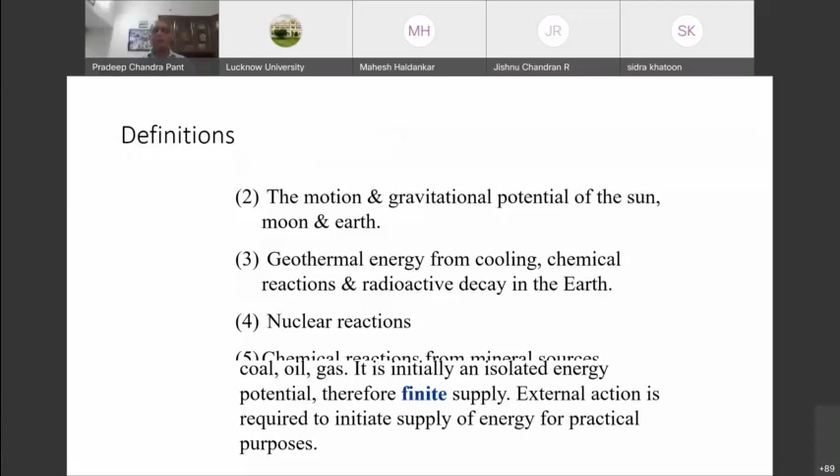So whatever we are getting as solar energy, when we talk about solar energy, it's coming in the form of heat. It's a current energy - in a sense, it is an income to us. Whether we use that income or not, ultimately when we use these as an energy source, you have to have human interaction to extract energy out of it, like if you take some coal in your hand.

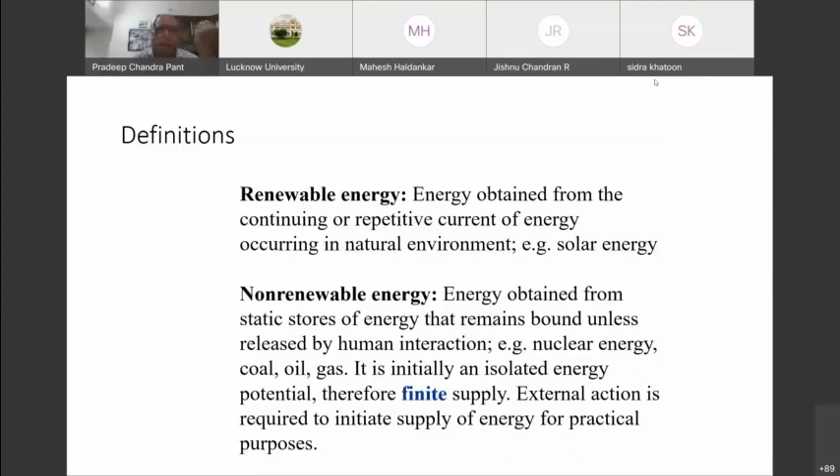But practically, if you look at it, ultimately renewable energy is coming from the environment, and ultimately it is going back to the environment. So the environment is acting as a source, and the environment is also acting as a sink.

And it is directly coming from energy itself, like solar radiations. They come from the sun in the form of heat or light, the visible portion, and ultimately part of that is being absorbed by the earth, and the earth or the atmosphere is acting as a sink.

All whatever is not being used, that goes in. But as we are accustomed to various applications now, if we look at our lifestyle, we do not want that to take a lot of time, and that's why whatever incoming radiations are coming, we have to convert it into a useful form of energy, and for that you require a device, and from that device you use whatever application you can do through that.

Maybe those radiations can be used in a photovoltaic device to collect, and then the electricity can be used for applications, maybe lighting purposes or heating purposes, or running the ACs or fans, or even in industry and all that.

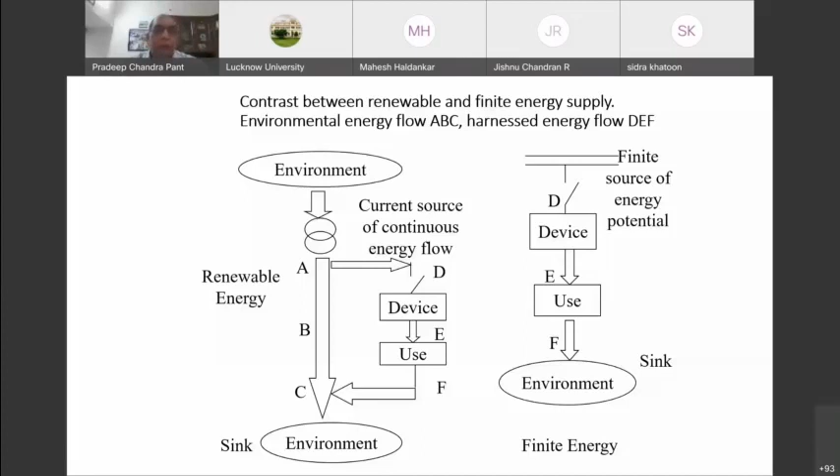Now, if we look at the planning process, ultimately you have to see how much energy resource is available to us. And the second and most important aspect is the purpose for which the harvested energy is to be used. The purpose is very important.

Whether you have to run a locomotive, whether you have to run a bus, whether you have to heat water, whether you have to directly convert it to electricity and then use that electricity for any other purpose. So ultimately, until and unless you are clear for what purpose you are doing that, you cannot just go with the efficiency aspect of that.

And particularly that will have an impact on the cost of the energy which you will be producing. And that price of energy ultimately, meaning the energy generated, and if it goes for application, if it is not being done efficiently and is potentially unviable, then even I will not use it.

And that happened actually in the early 2000s, when the cost of electricity generated from solar devices was so high that nobody went for that. Of course, a lot of research and the economy of scale had also played its role, and ultimately the cost had come down, and now people have started adopting that.

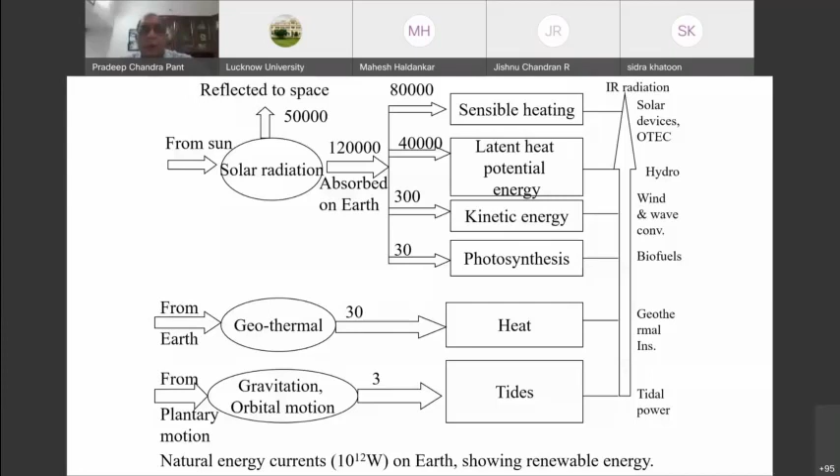We don't even feel it sometimes. You might have observed the term 'red hot' - when you heat maybe an iron rod or something, you feel that energy. It's the radiation actually through which...

Am I audible? I'm getting some kinks here. Hello, no reaction is coming from the other side? Your voice is breaking, sir. Oh okay, I'll try now to keep my mic here. Perhaps, yeah, now. It's not always okay. That may be because of internet connectivity and all that. Though the Wi-Fi is good in my place, but still sometimes it happens. Okay, anyway, so around...

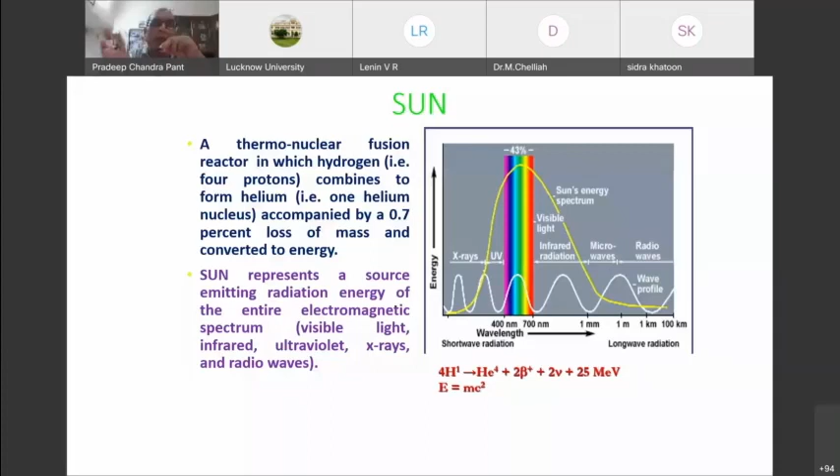But most of the ultraviolet part is absorbed by the atmosphere. If we look at the radiation coming, the distance between Earth and Sun is very large, basically 149.5 million kilometers, and radius-wise also, though the Sun is quite large, it appears very small from here. So practically, if you look at this, it's not like this - it's basically subtending only an angle of less than 1 degree.

So practically, let me put it this way - if I put a small angle like this, is it visible? If you see a big angle versus a small one - if you're far off, then these rays stay parallel to each other. And that's why whatever radiation is coming to us, we say it's parallel radiation, or beam radiation.

The second part of radiation which is coming is basically diffuse radiation. If you look, this is the solar radiation - part of it, which is coming, is reflected back from the atmosphere. The direct radiation is the sun rays that come straight back to Earth without any scattering or deviation in their route - that we call direct radiation. Part of the radiation which is scattered through reflection - there are dust particles, water vapor, clouds also there - so those radiations come after a lot of reflection and scattering and ultimately reach Earth. That we call diffuse radiation.

And the sum of those two is basically the global radiation. That's what it is. And practically, outside the atmosphere, where there is no atmosphere, we get something around 1367 watts per meter square, which we call the solar constant.

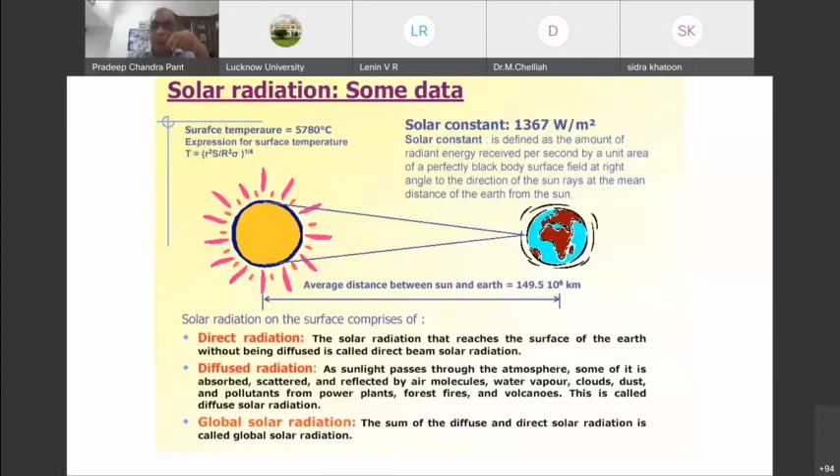Normally as a standard we say 1000 watt per meter square, or 1 kilowatt per meter square, is the rate. At a particular point we get that much, it may be less or a bit higher. So ultimately we look at the solar radiation spectrum - the ultraviolet part, visible part, and infrared part. Outside the atmosphere, we get that type of radiation, almost smooth.

But as it enters inside the atmosphere, we get a lot of absorption bands, some because of water vapor, some because of oxygen, some because of nitrogen or whatever it is. Ultimately this is the type of spectrum we get, which we call AM 1.5, which is basically the air mass.

When the sun travels from morning till evening, the actual distance a sun ray travels within the atmosphere changes. When it is overhead, we say it is at the zenith. But if it's just coming up in the morning from the horizon to the upward side, the distance covered is more. And when the distance covered is more, the absorption will take place more, and the spectrum will change.

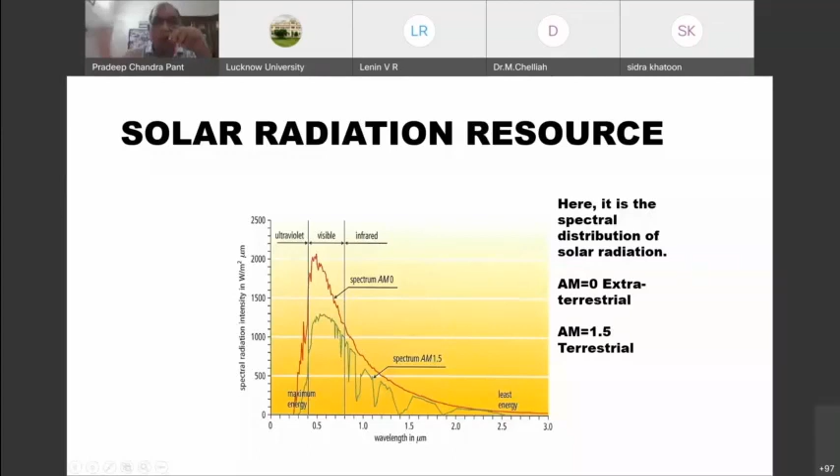This balance is such that the atmosphere layer doesn't get thicker, so that our temperature should not rise beyond maybe 1.5 degree Celsius of average atmospheric temperature. So that's what it is - in a sense this is what has already been explained.

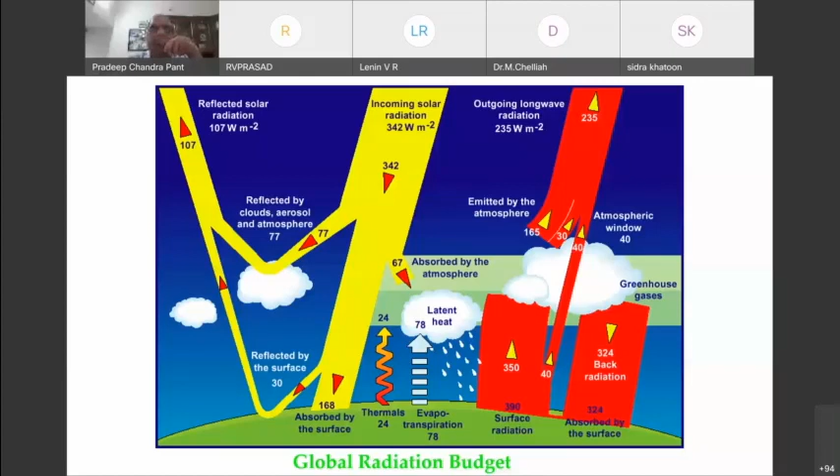So on a typical cloudy day, we get mainly diffuse radiation. But when there is clear sunshine, we get mainly direct radiation. If you measure radiation maybe in September, October, or in February, March, April, you would get a radiation level of around 800 or 900 watt per meter square, mostly direct radiation. But on a typical cloudy day, the total incoming radiation on Earth will be around 300 or 400 watt per square meter, and that will be scattered or diffuse radiation.

So our aim in solar applications is to use both direct and diffuse radiation such that we can collect that heat, and that's why in thermal applications we use the word collector, while in photovoltaic applications it is direct conversion of radiation into electricity. So there the spectrum portion of solar radiation matters, while in thermal application it's basically the radiation which is falling.

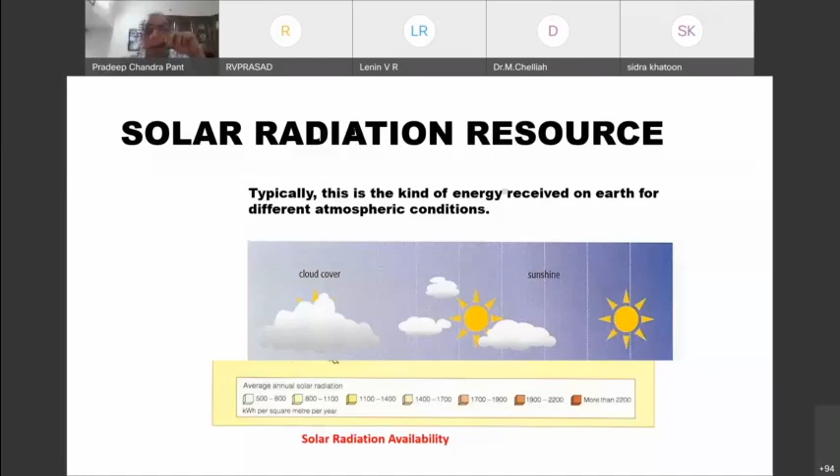Most of the solar radiation means it is very good, the solar intensity is very good. If you look at the polar side, on the extreme north or extreme south, the solar radiation level annually is hardly 800 to 1100 kilowatt hour per square meter, that is what you get in a year. But go a bit ahead and you'll see it's 1100 to 1400 a year in this portion, then a bit more. As far as we are concerned, we are somewhere here, which is 1700 to 1900, or even 1900 to 2200. So that's our level.

And ultimately, most solar radiation, that's why we thought these all the 121 countries within this should come together and make an alliance so that the optimal utilization of solar energy we can do. Now, with the success of the solar alliance, almost all countries are becoming part of this alliance. That is one very great achievement of India, making an alliance and being the leader of it.

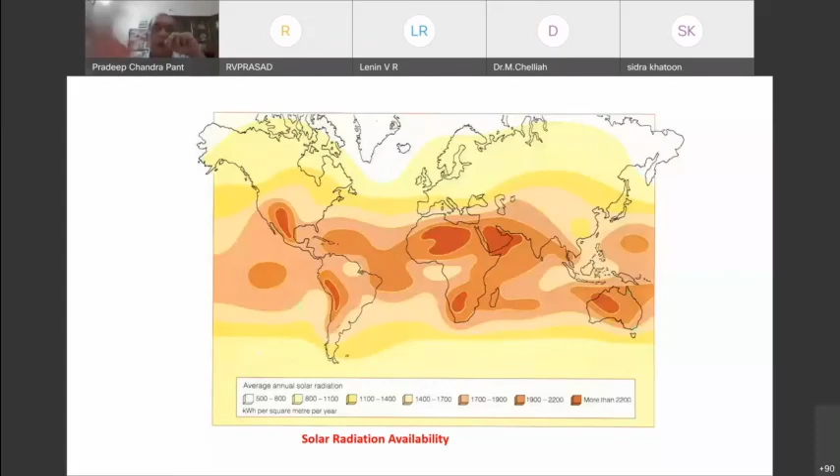And so important is solar energy, and is the solar energy. So how is the solar energy coming? Actually, if we look at the utilization of solar energy, there is one, the direct method.

The indirect method is practically the hydropower, or the wind blowing, only because of solar radiation, because it's the temperature difference between two places which allows the wind to blow from one place to another. And then biomass, of course, through the photosynthesis process you get huge biomass. Wave energy again is similar to wind. And ocean temperature difference means there is a temperature difference on the upper layer of the ocean, and then maybe 4 meter, 5 meter, 6 meter below, there will be a temperature difference, and that gradient can be used for generation of electricity, which we call the ocean thermal energy conversion system.

And to some extent, that principle is also being used in solar pond, wherein we make different layers of salty water. On top it is pure water, and then a bit salty water, so the layer concentration will be more. As the concentration is more, it will be heavier, so it will settle lower. So when the temperature at the top changes, and part of that goes down, it's being used for generation of electricity. So that's basically the indirect method.

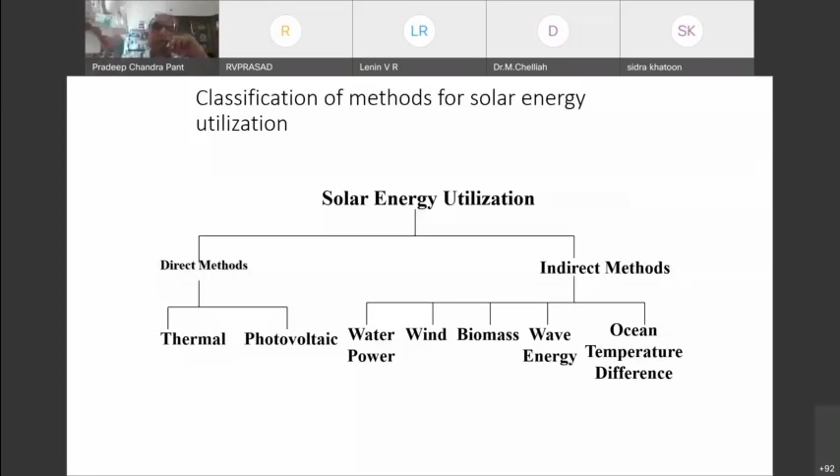Now, if we look at solar thermal, which is basically classified based on its application, you can have a low temperature application, which is practically for cases where you don't require hot water. You require water of maybe around 30 degrees, 25 degrees, or even 15 degrees.

Sometimes the atmospheric temperature is 4 degrees, and you get even 15, 20 degree hot water, and you will feel it's warm. Like you might have seen in hand pumps, borewell water. Most of the time we say that the borewell water is warm in winter and it's cold during summer, and we feel it.

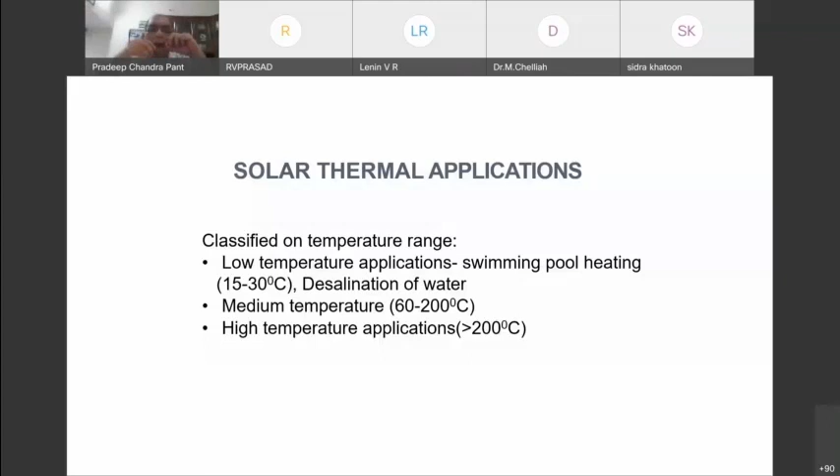Practically, if we look at any solar thermal system, it will have one heat collector, and that's why I'm using a collector here, you have to collect the heat. Then there should be a heat transfer mechanism wherein the collected heat is transferred to a working fluid or maybe the air itself. And whatever heat you have transferred from that collector to the working system, that should be stored somewhere. You require a storage tank, it may be a simple insulated hot water tank or maybe a boiler sort of thing.

And ultimately, if you have to make the system more sophisticated, you can have a regulator system also, wherein you can maintain the temperature or flow, whatever it is. So a regulator system may also become part of it. Whether it is an active system or a passive system - active system is where you have the regulation mechanism, passive system is where it works on its own. So that's the type of thing.

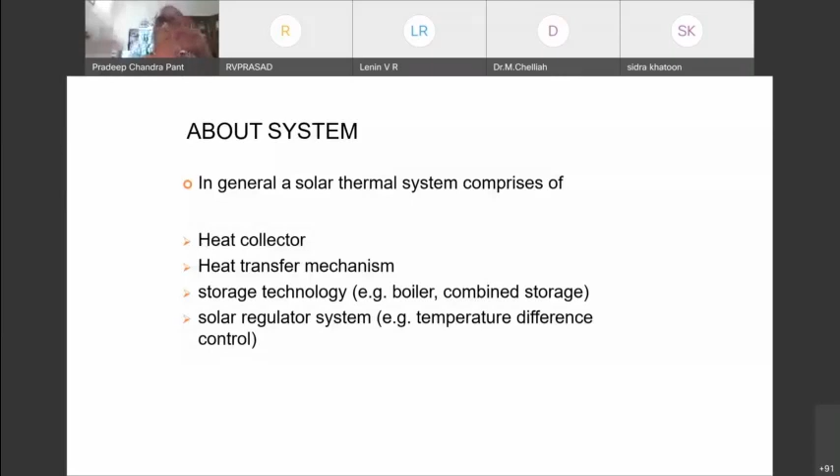So ultimately the whole idea is we are getting the solar radiation, and that solar radiation needs to be used for generating heat, and that heat needs to be trapped or collected somewhere. So that's the whole principle of the solar thermal system. If we look at a typical solar thermal schematic design, you have a solar collector.

If it is an active system, then you may require a pump. But if it is a passive system, then because of the thermosiphon, you get the flow there. Ultimately, this is how the thing works.

So practically, in a collector, what is the collector? The collector absorbs the solar radiation - the sunlight, or rather the radiation - which is converted into heat, and that will be trapped or collected, and then it is transported, the heat to a heat exchanger via pump or directly by the thermosiphon method. And that heat exchanger transfers it into another fluid, and ultimately you use it.

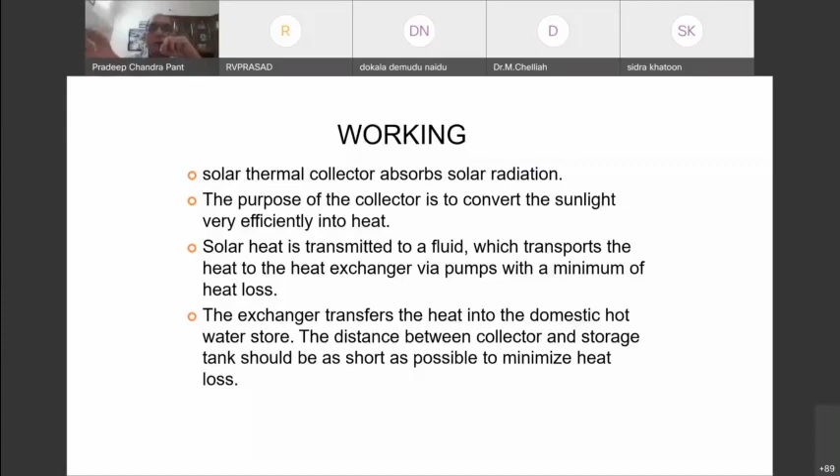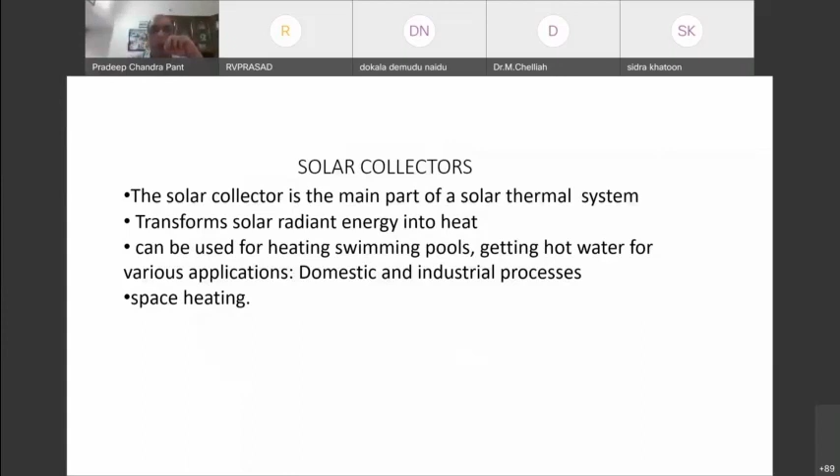So practically, the solar collector is, in a sense, the heart of every solar thermal system, that transforms the solar radiant energy into heat and can be used for different purposes. Now to understand how this whole process takes place, we have to know how the heat transfer takes place. There are only three methods, you know.

The heat transfer process has three types: one is conduction, then convection, and the third is radiation.

To understand this, suppose I have a fruit available, and we have to distribute it among, say, 10 students or 50 students or 20 students, whatever it is. There could be three methods. One method is: since I have the fruit basket, I give it to the nearest available student and tell him to pass it on to his neighboring student. This way the fruit will go up to the last point.

In a sense, I am the source of energy, and conduction takes place through a molecular or atomic process. The heat is absorbed by the first atom or molecule, it transfers to the nearby molecule, then to another, and ultimately goes to the last point. That is basically the conduction process.

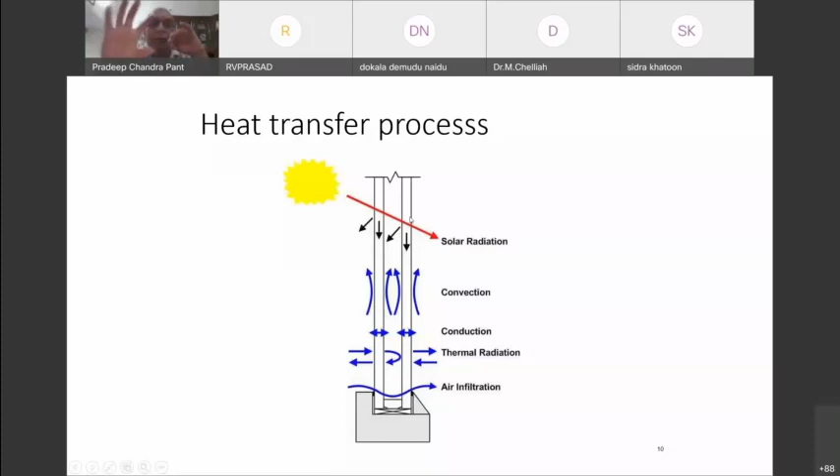So that's the process, basically the heat transfer process. My aim in a collector is to collect as much as possible. So if I have to collect this, the first thing required is the conductor.

Where the solar radiation falls on a metallic surface, what will happen? It will have good absorption and absorb it, and since it is a good conductor of heat, the heat is usually distributed. I take a good conductor material—it can be iron, copper, aluminium, whatever. Then the solar radiation falls on that collector, and once it falls on the collector, it will absorb.

The second thing I need to do is absorb the maximum of whatever radiation falls on this collector, so it should have good absorptivity. To make it a good absorber, the visible portion, which has higher energy content, needs to be absorbed—the UV and visible portion should be absorbed.

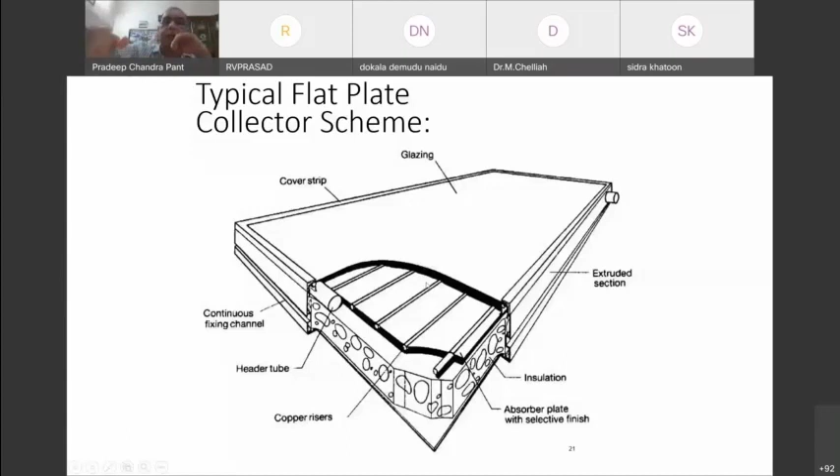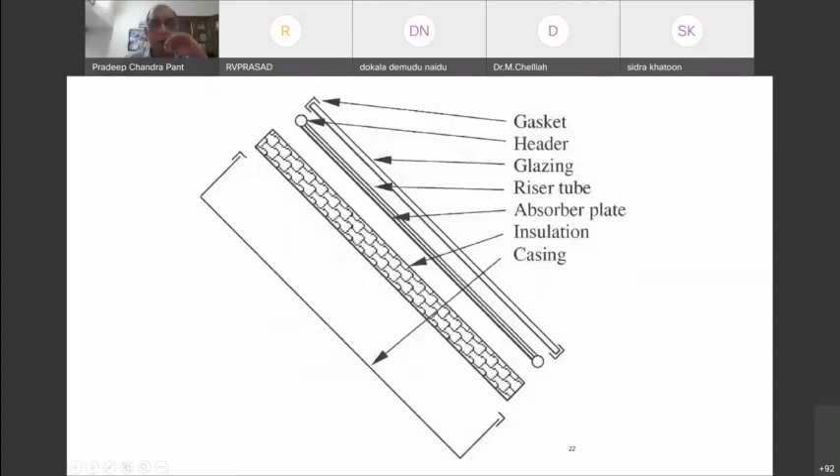Now look at this. If it is a flat plate collector, the design I have explained so far is practically a flat plate collector. So in the flat plate collector, you see that one ray which is coming from here will touch one particular point. Is that clear? The solar radiation at a particular point, only one ray is coming. So in a technical sense, I say that only one sun is intercepting a particular point. Of course, diffuse radiation will also play its own role, but ultimately it's the direct radiation falling on the flat plate. So at a particular point, only one ray, and this ray is coming to this point.

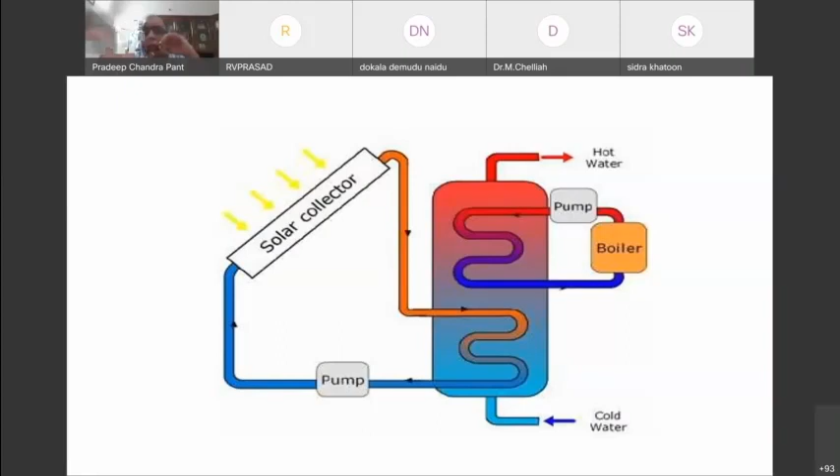So this collector, whatever design or insulation or energy trapping mechanism I use, I will not be able to generate a temperature of more than about 130 to 140 degrees Celsius at most. And then when I transfer to the working fluid, the heat transfer will have its own efficiency, so ultimately I get a temperature of 60 to 70 degrees Celsius. This is basically in the mid-range, and if I want to work at this type of temperature range, then I'll use a flat plate collector.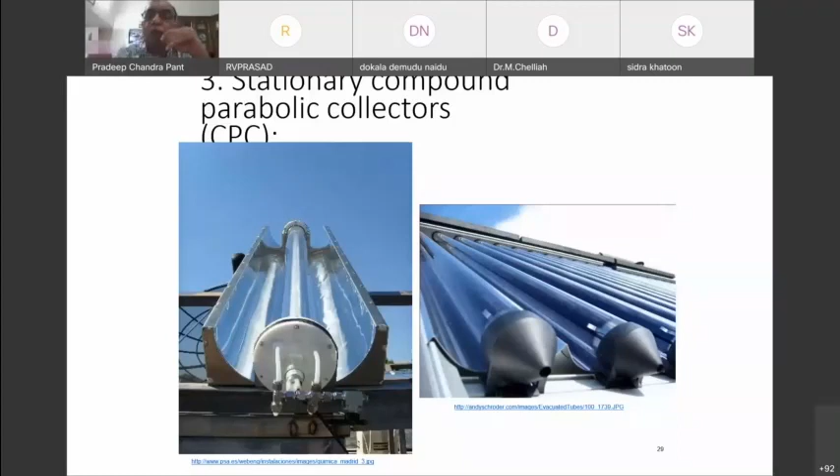The different methods, but basic principle is the same - somehow you have to create either a greenhouse effect, if convection is the issue, or you have to reduce the losses by avoiding convection loss and radiation loss. So that is the basic principle.

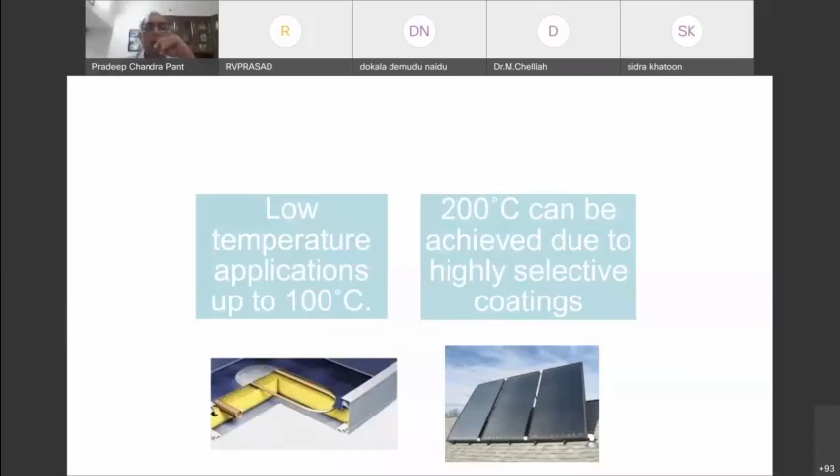Now I have mentioned there's no pump which we use - it's basically because the water gets heated up and becomes lighter, and this creates a current. But if it is a large system, then this thermosiphon current which is generated may not be adequate, and if it's a heat exchanger sort of thing, then you may require a pump. This is a thermosiphon system.

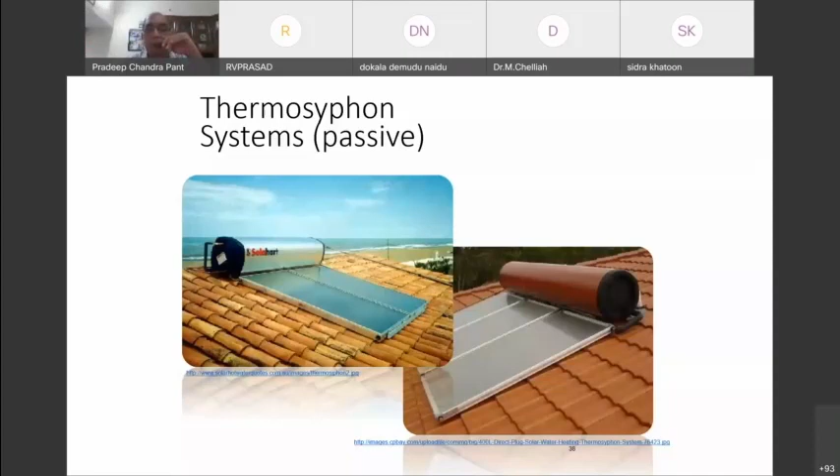If it is a large system, you may require a pump for a forced-flow sort of thing, an active system, and it may also have an auxiliary. You can make a closed loop type of system with a heat exchanger, which can be tube-in-tank or tube-in-tube type. In tube-in-tube, you have a double wall type of tube where the same liquid flows continuously through the collectors inside, and outside is the water being used. In tube-in-tank, you have a hot water tank with the closed loop heat exchanger inside it.

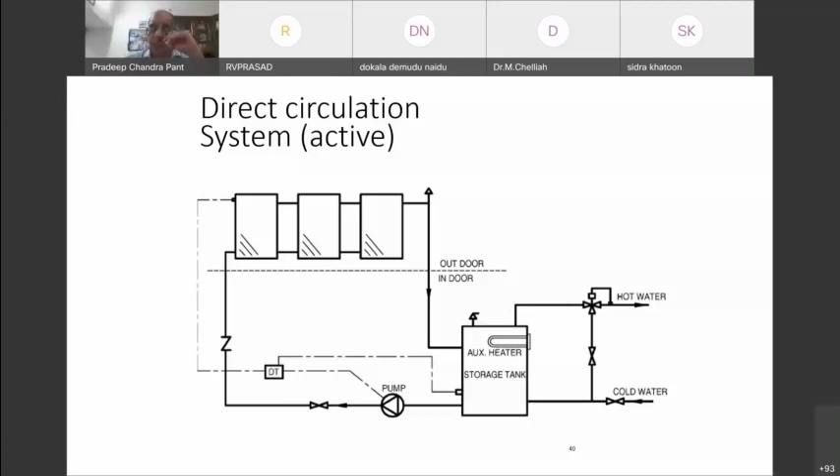In that case, you call it tube and tank type, like for swimming pool sort of applications. A lot of collectors used there are unglazed, and the water is circulated through a pump to the pool, giving reasonable heating. For that type of application, you don't require glazing because you don't need a very high temperature.

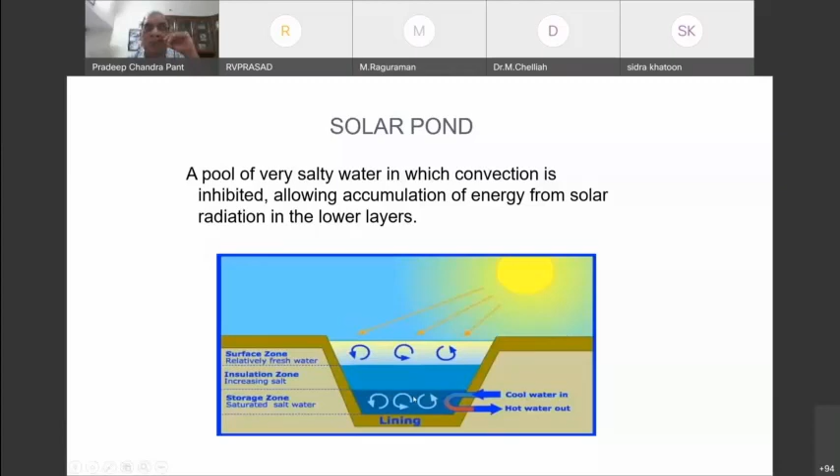This same principle is being used for space heating purposes, which I have already shown.

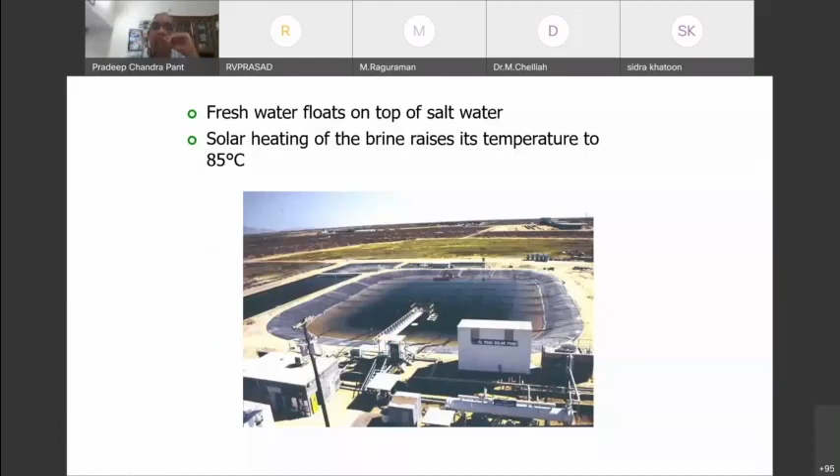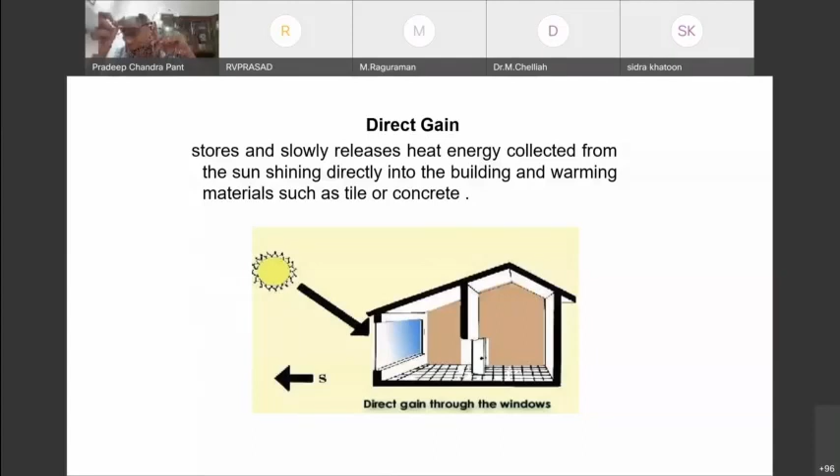Then there is the passive building concept, wherein you design a building in such a way that you can gain maximum heat inside. In India now, large buildings use a lot of glass, and as I mentioned, glass has a tendency to allow lower wavelength radiation to go inside while being opaque to higher wavelength, so the temperature inside gets heated.

This means more use of air conditioning, so that's not a good way of doing things. In the western part, where the temperature is low, it's okay, but in India, perhaps that is not good for making passive buildings comfortable.

Some experiments were done. One is there in Lucknow, the NEDA guest house, which was made with the passive concept. Even the original building of the National Institute of Solar Energy was also based on the solar passive concept, wherein almost all possible concepts were demonstrated in the older building, not the newer one.

So that's what, friends, I had to share. I think I could give some insight, though I'm not very good in mathematics and perhaps stayed away from calculations to some extent.